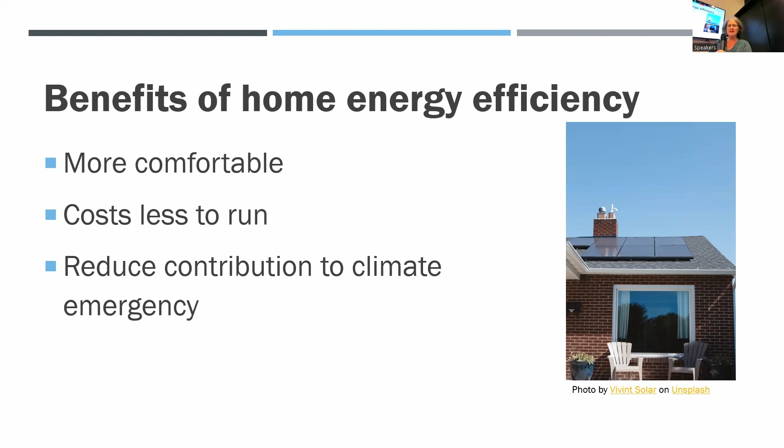The average Victorian home is fairly poor. Based on the scorecard tool, which is what I use as a sort of benchmark, the average home, 3 stars, costs about $1,800 a year just to run the main fixed appliances. That's heating, cooling, lighting, hot water, not all the other stuff. And that's quite a lot of money. The good thing about this, well it's not good, but the good thing is that it means lots of us have a huge amount we can save if we take some action.

I think the reason our houses are typically not too good is we've had a really mild climate, not many good building codes, cheap fuel, and most of us don't really know that much about home energy efficiency, which is why I love talking about it.

The 3 main factors of home energy efficiency are the building shell thermal efficiency. It's sometimes called the envelope, and it's just about how well your building keeps warmth in winter that you've generated, and heat out in summer. Appliance efficiency is about how efficiently your appliance gives you what you want. So if you've got a heater, how efficiently does it give you heat? An example is an open fire is about 5% efficient because most of the heat goes up the chimney, whereas something like a really new reverse cycle air conditioner will give you 300% the value of what you put in.

User behaviour is something that feeds back into both of those things. It works with everything. You can have a super well-designed house and energy efficient appliances, and it still would be possible to be very inefficient, and the opposite.

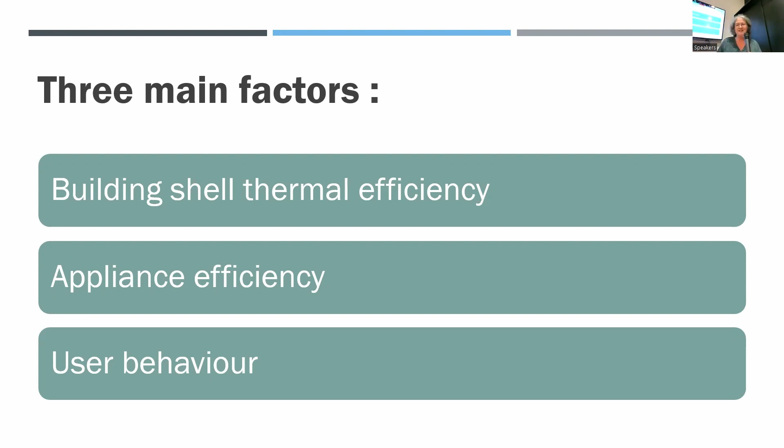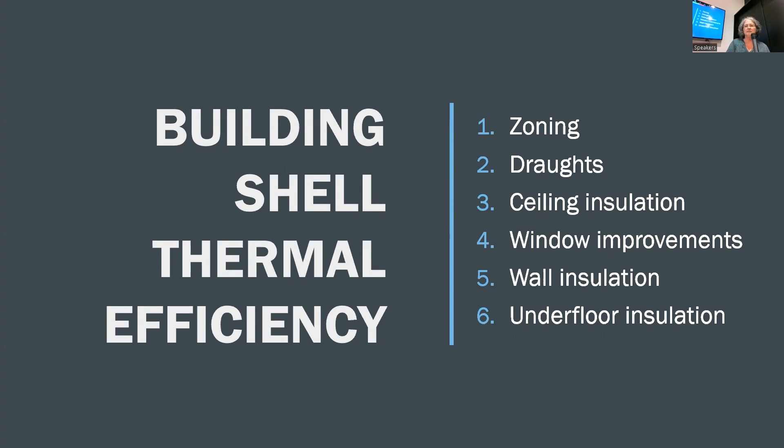So for building shell thermal efficiency, the key things I'd always look at are zoning, draughts, ceiling insulation, window improvements, and wall and underfloor insulation. These all play a part. With zoning, it's about creating multiple smaller zones, or the ability to create them. You don't have to always keep them closed, but being able to close them lets you zone areas in to keep warm or cool, or zone drafty areas out. Heating and cooling by zone is always the cheapest option.

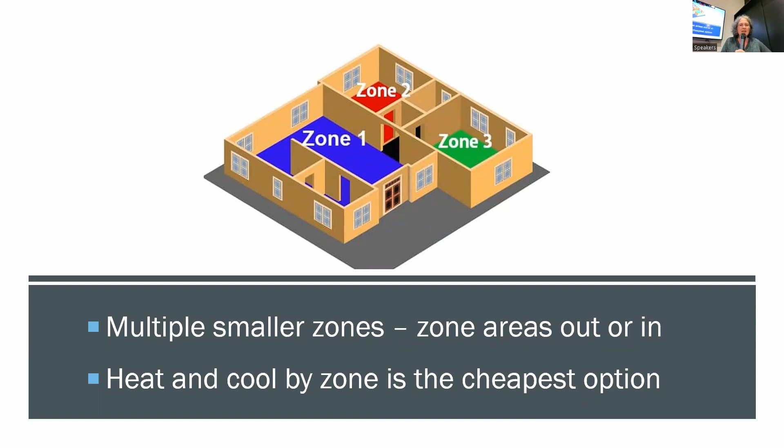Here are some great ways you can add zoning, even in places that haven't been thought about when built. It's a good example of what I see all the time - two-storey houses where they're trying to heat the bottom, the top, and the stairwell in between. Anything you can do to just chop your house into smaller bits when heating and cooling is going to help.

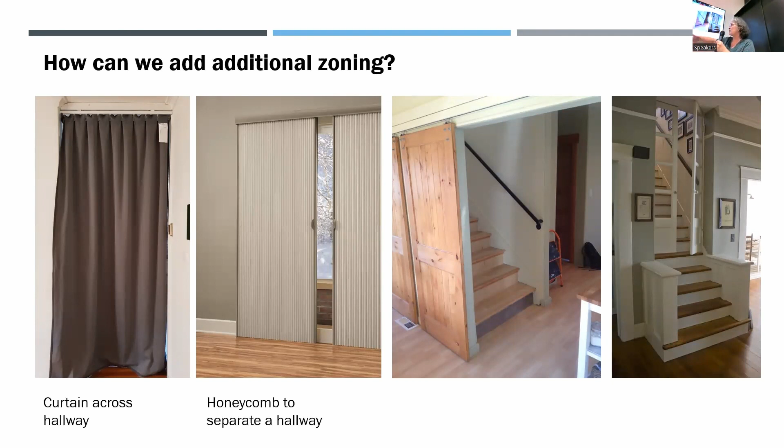This is another of my favourite options. You can buy a telescopic pole from the hardware store that you hang a curtain on in a doorway just in winter, and really reduce the amount of space you're trying to heat.

Draft proofing is another really good one. Zoning and draft proofing together are usually low cost and quite easy to do. There's a whole stack of places that you can commonly find drafts in a house.

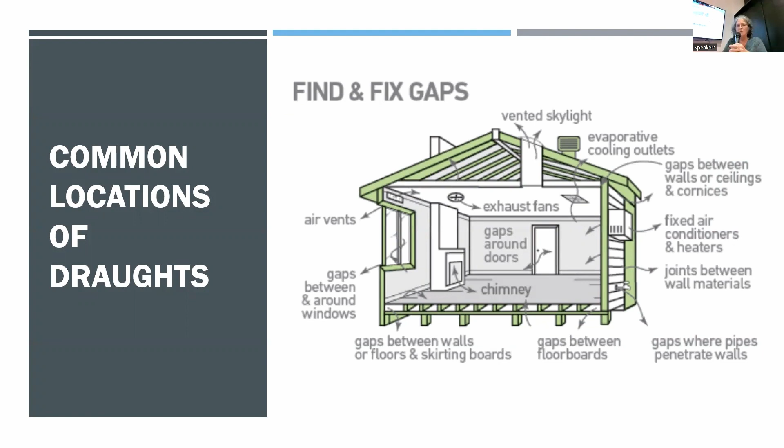I'm not sure if you can see that picture very well - can you see up the back? What I'll do actually is show you a graph. I'm not sure if you'll be able to see it properly because it's such a big graph, but this shows different kinds of drafts and the impact they have on your building shell efficiency.

The biggest impact is an open chimney, like I mentioned - they just suck air out of your house constantly. So it doesn't mean you can't have an open fireplace, but it's important to block it up when you're not using it. There are plenty of ways you can do that, very cheaply or with more fancy things.

The other really big impact is a large gap, something like a permanently open louvre window, like in a 70s bathroom. Then there are things people sometimes don't think about, like evaporative cooler vents - actually quite an impact - and wall and ceiling vents. This is a louver window too, but that's one of the closable ones. So there are plenty of ways.

Imagine if you could tackle even 80% of the drafts in your home. They say that the average Victorian home, if you add up all the gaps and cracks, it's like having a metre square window open all the time. Imagine if you could close that, or nearly close it.

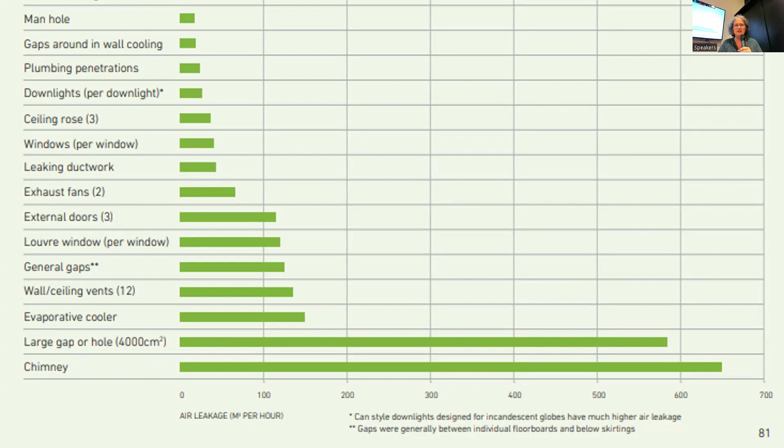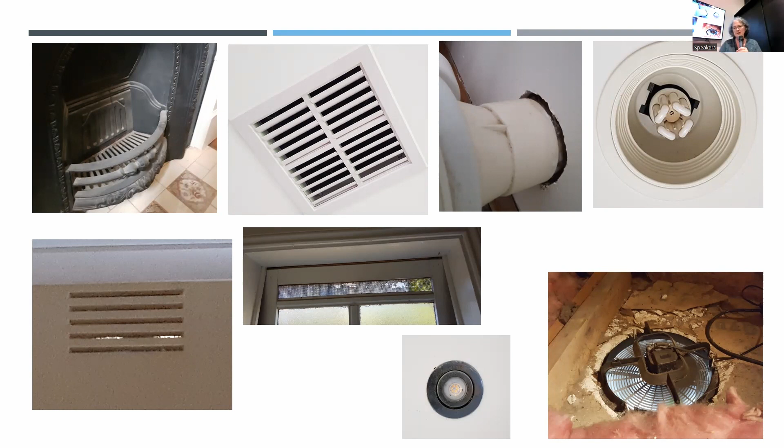This is just a picture of some of those gaps - wall vents. A lot of people don't realise you don't need them anymore unless you have a gas heater. That's a permanent vent in a window, and these are evaporative cooler vents. These are just random ones from when plumbing's been done. And that's what a exhaust fan that's unsealed looks like from in the ceiling space - just a hole straight into the roof, which you can imagine is a drafty, dusty place.

Ceiling insulation - the two key things about ceiling insulation are the R value, or the thickness, or the ability to stop heat transfer. And the other thing is it's really important that there's even coverage.

These are some examples of what frequently happens - you might have perfectly good ceiling insulation and then tradies come along and install something, lights or whatever. They pull it all away and suddenly you haven't got ceiling insulation anymore in big spaces. When you have 5% gaps in the coverage of your ceiling insulation, it actually halves the value at which it works. So it's very important to get full coverage.

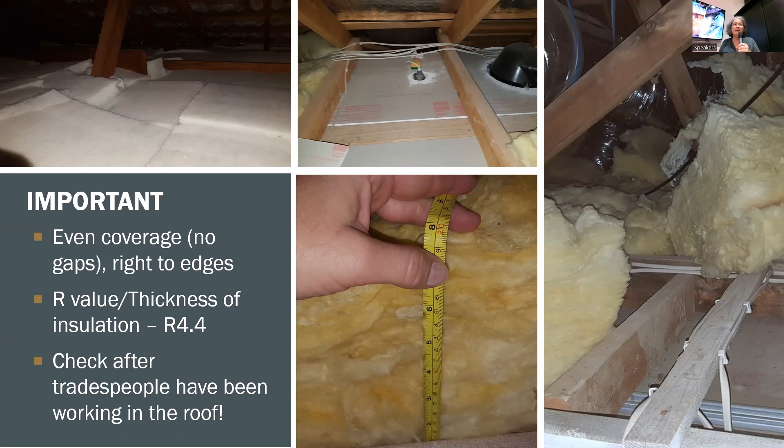This is another example where work has been done and what looks like really good insulation has just been moved around. So sometimes it's as easy as somebody getting up there and rearranging it, putting it back where it should have been.

Window improvements is a very favourite topic of mine because there are so many ways you can improve your windows, and it doesn't mean you have to spend $40,000 on new double glazed units. If you can, great, but there's a lot of things you can do on a very low budget. The reason windows are third on the list after zoning and drafts, then ceiling insulation, is because they're such a weak point of a building shell. Single pane glass has very poor insulating ability, and even double glazed glass is better but still allows heat transfer. So it's great if you can do a combination of things.

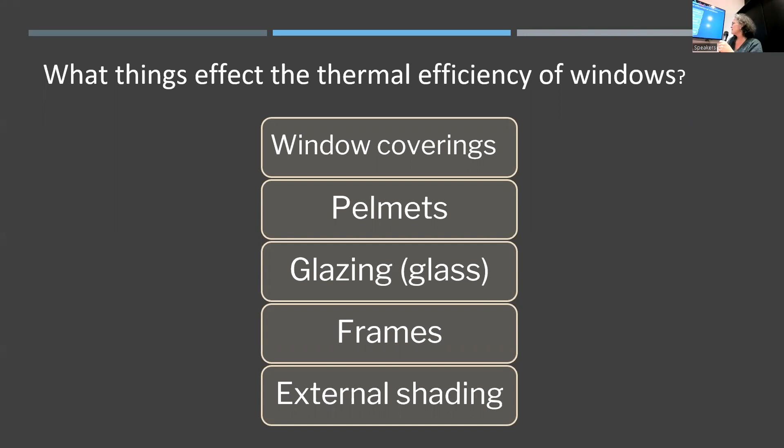The parts of a window that make a difference are window coverings and pelmets - they sort of go together. Then glazing or glass, frames, and external shading.

Sometimes, quite often I think, the easiest way to start is with improving your window coverings and pelmets, because it can make a really big difference with how you can keep your heat in winter especially. The key is to reduce airflow across the glass. Anything you can do to stop air flowing across the glass will help stop the heat moving through it. The best way is heavy drapes with an invisible pelmet on top.

Another good way is to put something like a honeycomb or cellular blind inside the window reveal. It doesn't work on all windows, but say these windows, for example, it would work quite well because you could put it straight inside.

You have no gaps, it's stopping airflow, so it's really efficient. These are examples of what's called an invisible pelmet. This one's just showing you can make it out of, I think, weed matting or something - something extremely cheap. And this one's pretty cheap too, it's just a DIY invisible pelmet kit. It's missing the whole boxiness of a traditional pelmet, but it still helps.

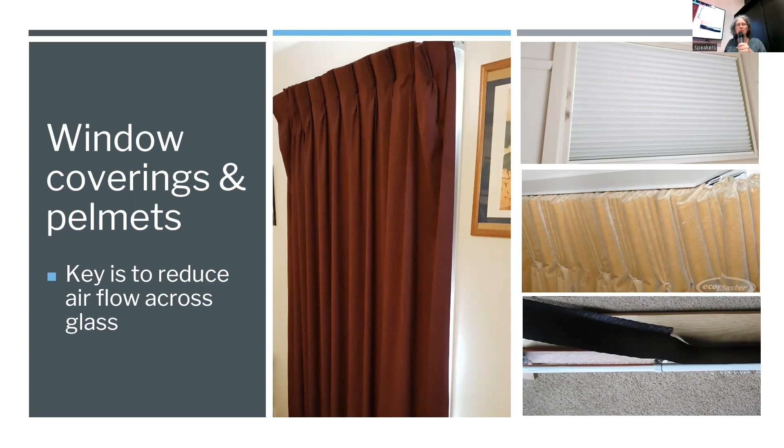With glass, there are all kinds of possibilities. There's, of course, double glazing with a brand new unit, and that's what most people do. But if you have really good timber frames - again, these windows are a good example - you could easily just take away the single glass and put double glazing in, and it's much cheaper. You've already got timber frames, which are the most thermally efficient frame, so keep them. Don't pay for new frames.

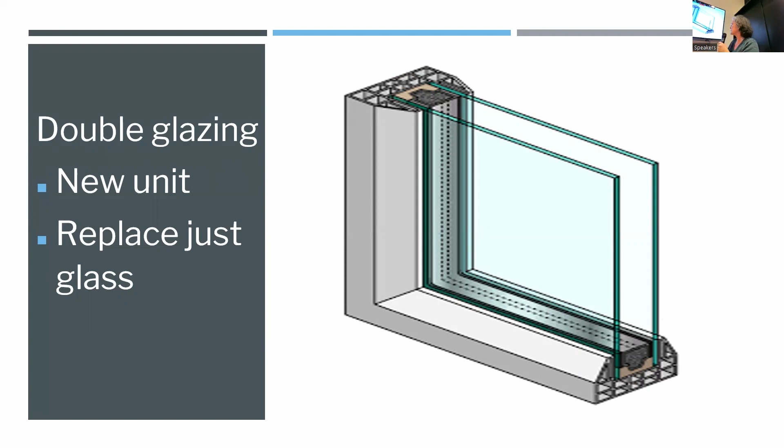If it's something like an awning window, often they can't handle the weight of double glazing. So something like secondary glazing comes into its own. That's where the original window and frame stay there completely, and you bring in another panel, usually clear acrylic - Perspex, I guess. It's completely clear, but it's lightweight, and that's why it works on sash windows, awning windows, sliding doors, and things where they might have trouble with a big heavy double pane of glass.

These are two pictures - this one is from Renew, the organisation. There's also a magazine just showing somebody adding clear acrylic, screwing it in basically with some timber beading. The only reason this coating is there is because it arrives like that so it doesn't get scratched, but that all gets taken off. It's completely clear, you wouldn't know it wasn't glass.

And then there's something called DIY secondary glazing, which is the same sort of thing. Actually, I'm getting myself mixed up - there are professional companies that do this, and they'll do it to a very high standard. Then this is a DIY option with clear acrylic, and this is a DIY option with making a pane. I think this is the one.

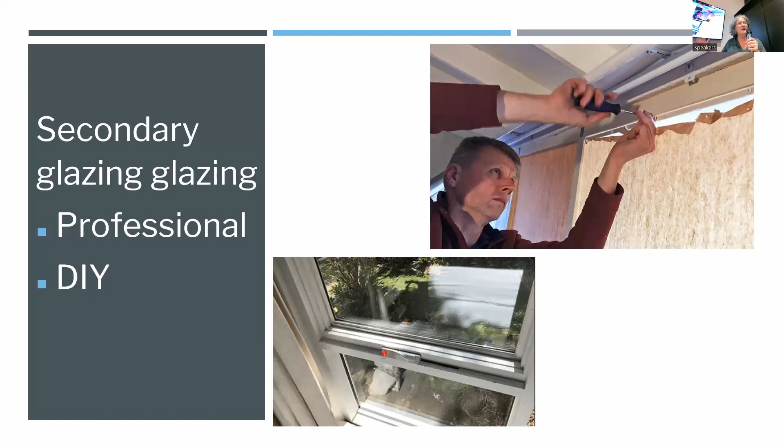You can just get the metal edgings that fly screens are made from and put clear plastic in them. If anyone wants a link, I can send you an article of how to do it. You just place them in your windows and there you go, you've got a removable second pane, which makes a big difference.

And then there's really low cost and temporary options. Well, that removable pane is one of them, but also bubble wrap, which might not look pretty, but if you're renting or on a really low budget - you're nodding, you've done it. Does it work? It works. Yeah, can't see out, but it works. So options for anyone - if you're freezing, you might care more about being warm than about being able to see out the window.

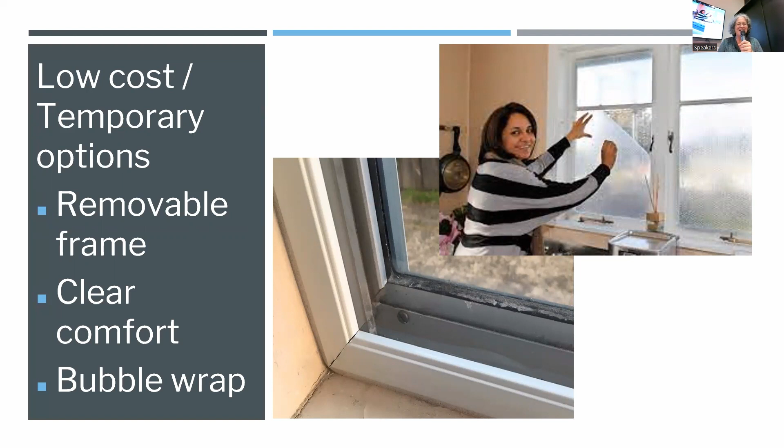Frames really do matter, and this is just to show that. This one at the top is a single glazed window with an aluminium frame, then a single glazed window with a timber frame, then a double glazed window with an aluminium frame - not too much better than the single. And then this is the best: double glazed with a timber or UPVC frame.

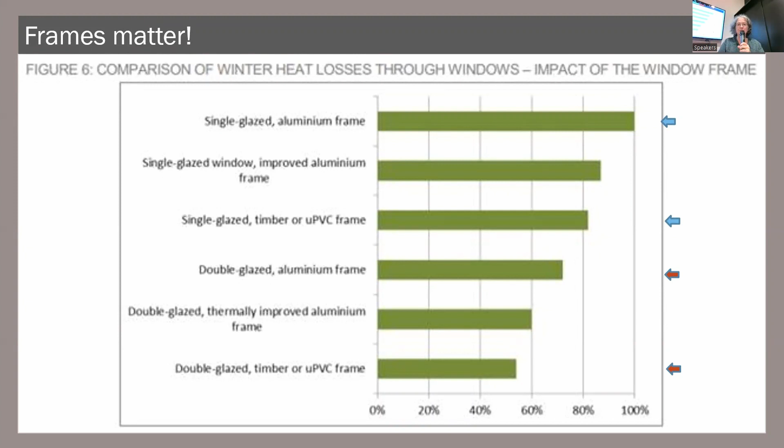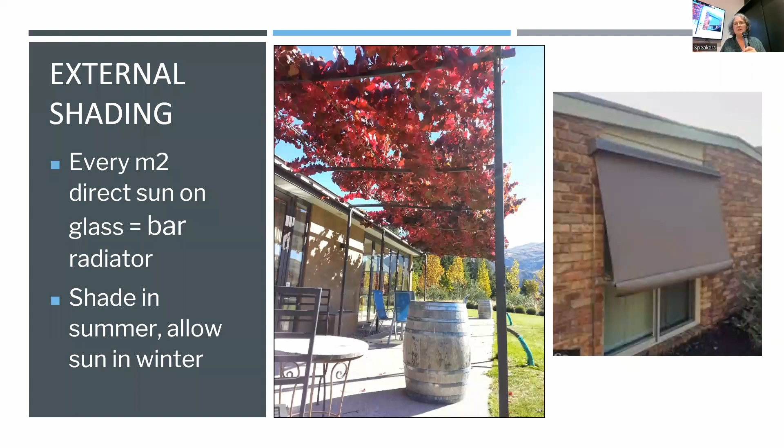External shading is the last thing about windows. It's really important if there's any issue with heat gain. You want to shade your external windows because the key is to stop the sunlight hitting the windows. Once it's there, coverings inside help a little bit, but the most effective thing is to shade it outside.

Claire, what's the time? How? You got 5 minutes?

Okay, thanks. Wall and underfloor insulation. First, wall insulation - not everyone knows that you can now have it pumped in. If you're doing renovation work on your house and removing weatherboards or plaster, the best way is to put in batts. But if you're not, you can just get it pumped in. They come with a big truck and blow it in with this type of reverse vacuum cleaner, and it's very effective. They can do it in either weatherboard or bricks.

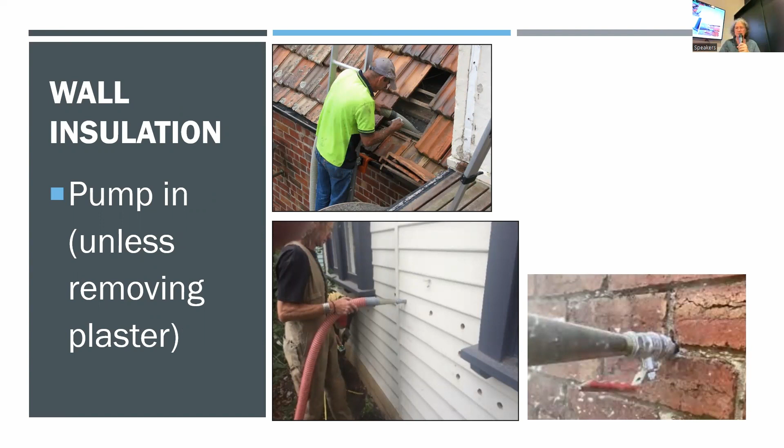Underfloor insulation is usually polyester batts, but it's a bit more rigid than ceiling insulation, and you can either strap it in or staple it into the sides. The key is to make sure you're actually buying underfloor insulation and not trying to use ceiling insulation under the floor.

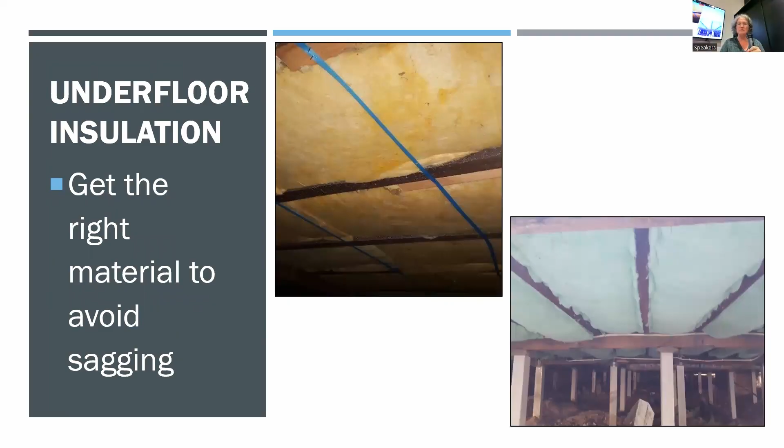And then the key energy using or generating appliances. Actually, I took the generating appliance out, which was solar, because we have an expert to talk about that. But heating, cooling and hot water systems - I'll just talk briefly about how to make them as efficient as possible.

So efficient heating - any of those building shell upgrades I talked about, the drafts, windows, etc., they're all going to make your heating more efficient in that it doesn't have to work as hard. If you've closed that metre wide window, then your heater isn't trying to continually replace all that warm air, so it uses less energy. If you do have to get a heating system, a split system, an individual reverse cycle air conditioner, which is the same as a split system, is the most efficient option.

Heating by zone - we talked about zoning already, but that can make a big difference. Setting a thermostat to a good winter temperature, which is about 18 to 20 degrees, is where those heaters will work most efficiently.

Servicing and cleaning - one example of that is this gas ductwork that's just falling apart. It's really important that you look after ductwork of ducted systems. That's the biggest loss you get in that sort of system, through the ducts.

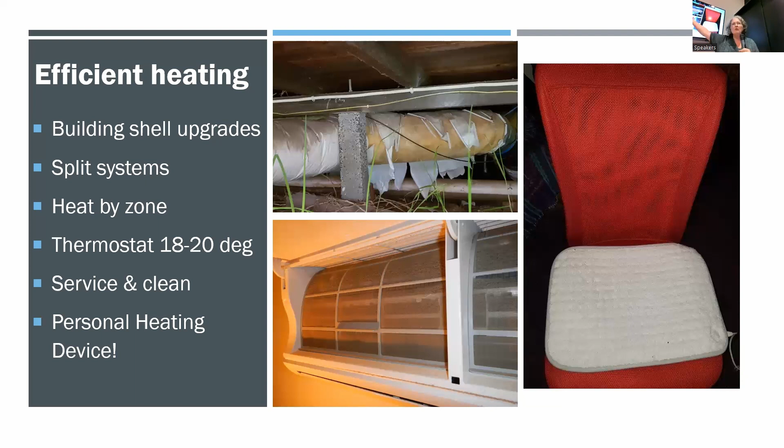And my personal favourite, personal heating device, also known as a PhD - so all of us can have a PhD, I have several. My teenage daughter has one too. It might sound daggy, but it's just the equivalent of a hot water bottle or an electric blanket. These days they make them into all sorts of amazing things, like heated throws, and I saw a heated foot pad that you can put under your office chair. This is my heated seat pad that goes in my office, and it means most of the time I don't need to put the heater on, because it's heating my body directly, and I've got my warm woolly jumper on. Instead of heating the air around me, it's just heating me. Everyone should get one.

Efficient cooling. A lot of this is the same as with heating. The building shell upgrades will help, plus the thermostat, servicing and cleaning, and cooling by zone. Of the most efficient options, ceiling fans and ventilation are key. We really need to think about ventilation when working out how to cool down our houses after a hot day, and potentially adding things like openable skylights at the top of stairs.

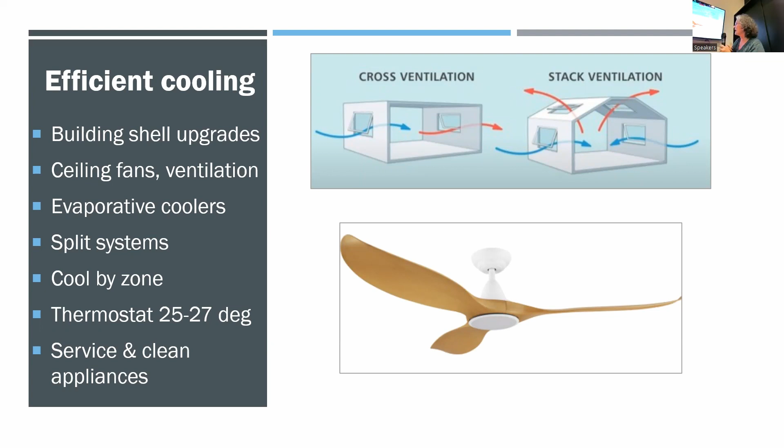If you need cooling, technically an evaporative cooler is the most efficient, but my personal feeling is that whereas 10 years ago they were probably a great option because of humidity, we are going to get a lot more heat waves, I think. Personally, I think they're not quite going to cut it anymore, and split systems are going to be the next best thing to do.

Last but not least, efficient hot water. There are really good rebates for replacing hot water systems, especially if you have an electric one. The most efficient options are solar hot water systems or heat pump. Some other things you can do for water are making sure your shower heads and tapware are reasonably low flow, because that reduces the energy needed to heat the water. Also insulating the pipes, called lagging, and this one has these beautiful valve hoses that also stop heat coming out of the system.

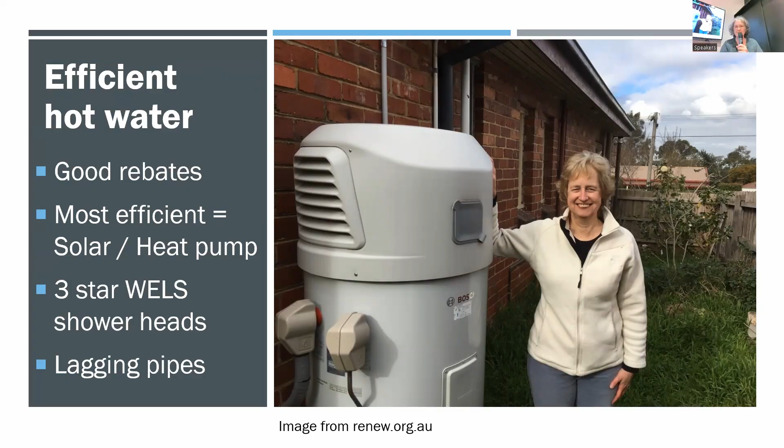I'm going to talk about renewable energy and a little bit about energy efficiency, because they go hand in hand. So energy efficiency first, and then generation second. That's the order it should be.

So I talk about technology. Companies send me a lot of products to do technical reviews and also to provide content for the public to learn about products. So that's what I do an awful lot of. I have a bit of fun while I'm doing it.

I even had a show for 2 years during lockdown because I couldn't go out. So I dressed up as a bad boy rapper and would talk tech. It was a tech show with me dressed up as a bad boy rapper. There you go. But anyway, let's get on to the main thing.

One of the questions I get asked a lot, because there's waves of enthusiasm for technology, and in the renewable space, batteries have suddenly become the thing. People keep asking me, should I have solar? Should I have batteries? And I always say you've got to start with what you want to achieve.

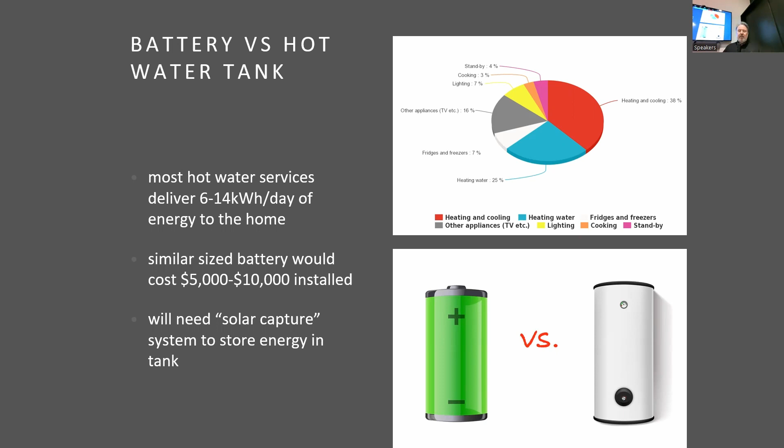To give a good example, I've picked two roofs in Melbourne, a north-facing roof and a south-facing roof, using the technical term peak sun hours (PSH)—the amount of energy falling on a surface daily. On average, a north-facing roof at about 30 degrees incline gets 4.67 peak sun hours, which can be converted into electricity by solar panels.

A south-facing roof isn't nothing—it's 3.48. Remember, that's an annual average. It'll be worse in winter, but almost the same in summer because the sun is still high. So a south-facing roof is really about 75% as good as a north-facing roof in Melbourne.

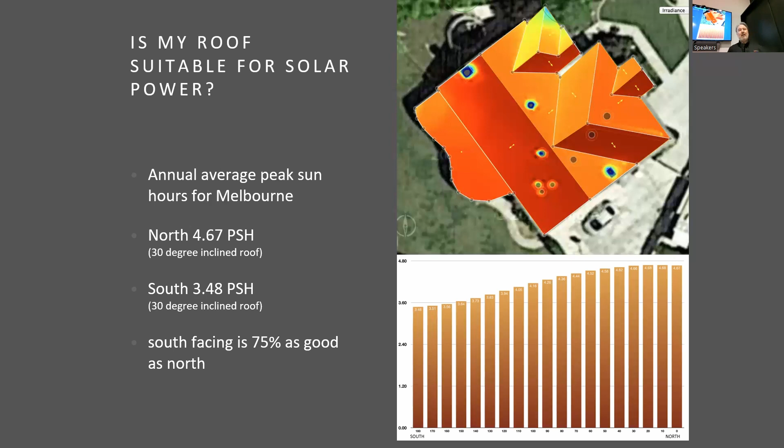If you're worried that south-facing isn't very good, a south-facing roof in Brisbane is actually better than a north-facing roof in Melbourne. It's all about latitude—the further south you are in the southern hemisphere, the bigger the difference will be. Any part of your roof that sees sun, even if not optimal, will generate some electricity. It can be modelled, and your installer can do those calculations.

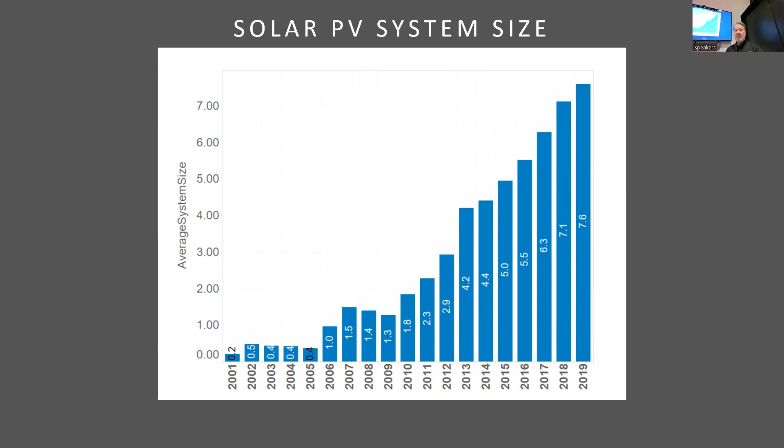For instance, the solar battery rebate has dropped from its opening value—it was about $4,800, now down to $3,500. The Victorian government realises that as a government they can directly fund big projects like a battery or solar farm, or give the money to mums and dads to put solar, batteries, solar hot water, or energy efficiency onto their homes, helping them reach renewable energy targets.

The solar hot water rebate program offers up to 50% support, up to $1,000, for solar hot water heating systems. Heat pumps are more expensive than a regular resistive element tank, but the cost savings are so great it doesn't take long to win out in terms of total cost of ownership—just a matter of years. The problem is people generally don't think about replacing hot water services until they fail.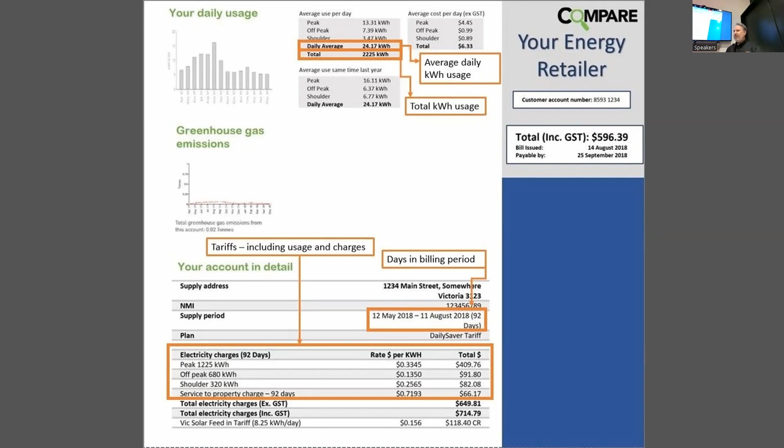And they're not affiliated with an energy company? No, they're not affiliated with any energy company at all. They were started by some academics from University of New South Wales.

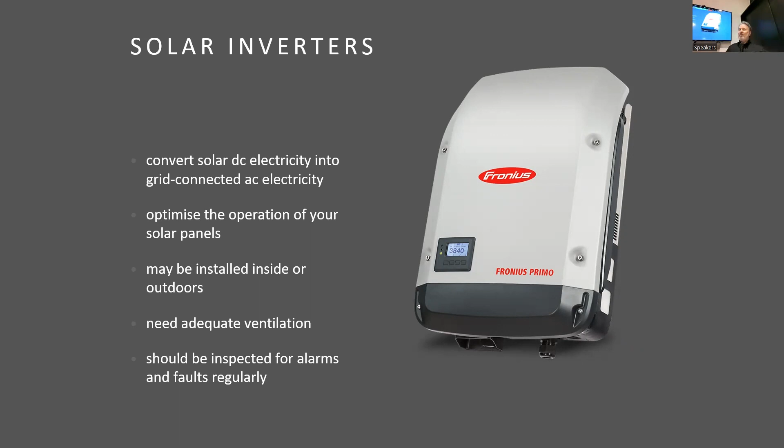Solar inverters - now we're getting into the solar stuff a bit deeper. What does an inverter do? You hear about inverter air conditioners and inverter fridges. Well, we're talking about something that takes solar power, DC energy, converts it to AC, and can directly supply appliances within your house. But a solar inverter by itself generally only works when the grid's present - it's not an independent system by itself. It needs the grid to function, but when the grid's there, it synchronizes with it and starts to feed your home with electricity.

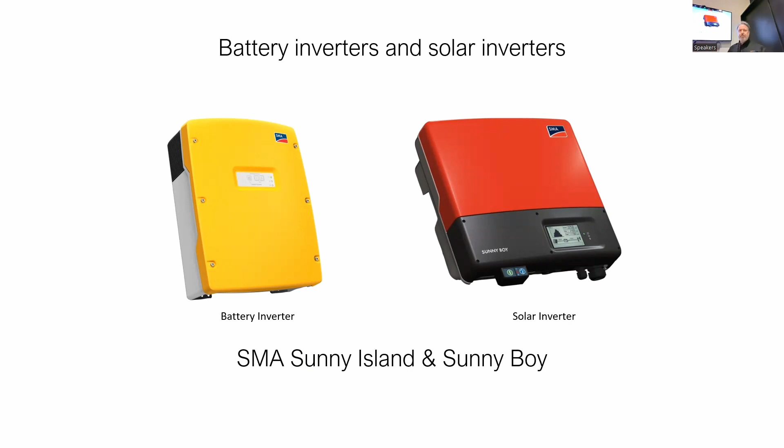Battery inverters can be a separate item, so sometimes you can have a solar inverter and a battery inverter. In this case, I'm showing the same brand, Sunny Island SMA and the Sunny Boy. The yellow one's a battery inverter and it can be a completely independent product - this is probably more typical of an off-grid system. So this one takes solar panels, and this one you connect to batteries. But sometimes they're combined into one product, and we call these hybrid inverters - they have batteries connected to them, they have solar panels connected to them. It's only one product, and that's very compact.

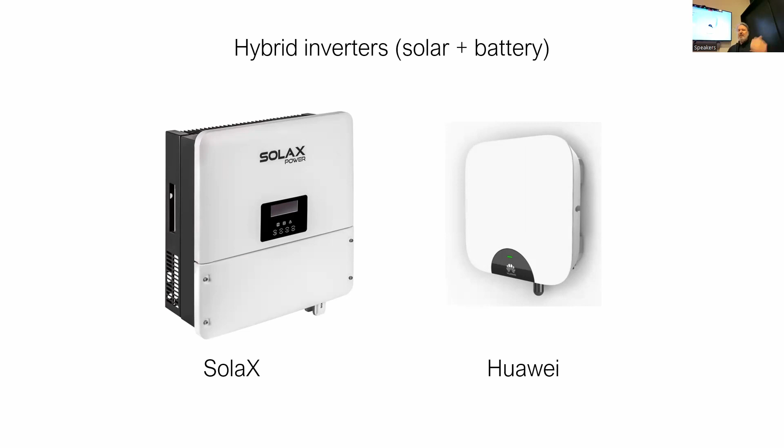So if you're doing a new installation and thinking about adding batteries at a later date - hopefully not too late, because products change - they can be what's called battery ready. It can work as a standard solar inverter, but maybe a year later you go, I'm ready, I'm going to add batteries to it. So hybrid inverters are basically an all-in-one solution. There are a couple of examples there.

Now you've probably heard of this company called Tesla. Some people think they're the only battery there is, but there's one of many actually. They're not truly a battery by itself - they're a battery and inverter in the one box, so it's actually a combined product. That means it can be added to any existing installation. You might already have solar and think, oh gee, I didn't buy a hybrid inverter - does that mean I can't have battery storage?

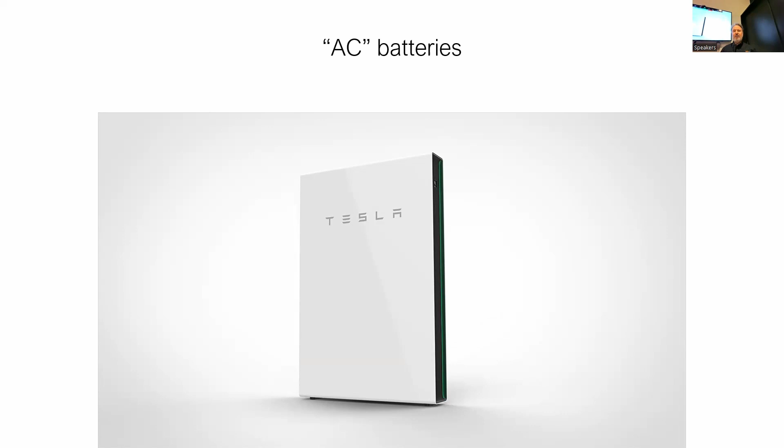There's some things that make solar panels work better, called solar panel optimizers. They really come to the fore when you have a difficult roof where you've got shading or multiple facets of the roof facing different angles. They can make every panel work independently of every other panel, so that's a really nice feature for houses with shading problems.

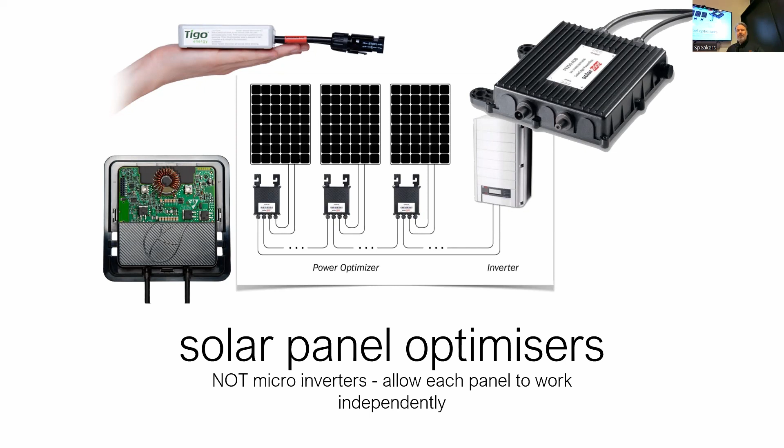With a system without those special optimizers on, the whole system would be the same colour because they all work together as one. It's kind of like stepping on a hose - you're just stepping on a little bit of it, but the water at the other end is affected. So optimizers overcome that problem by making every panel effectively independent.

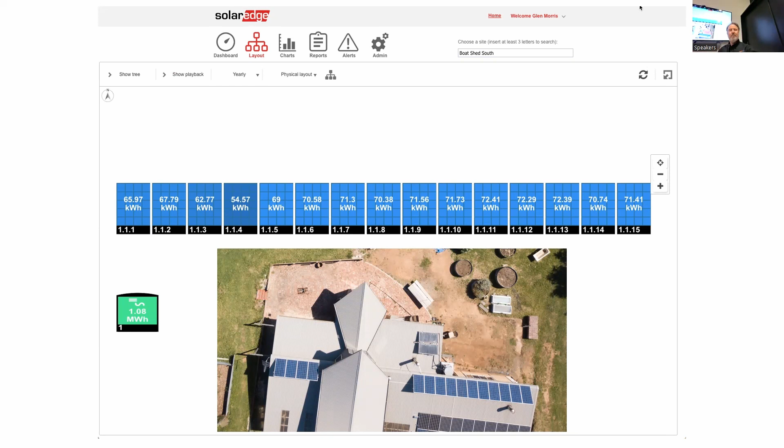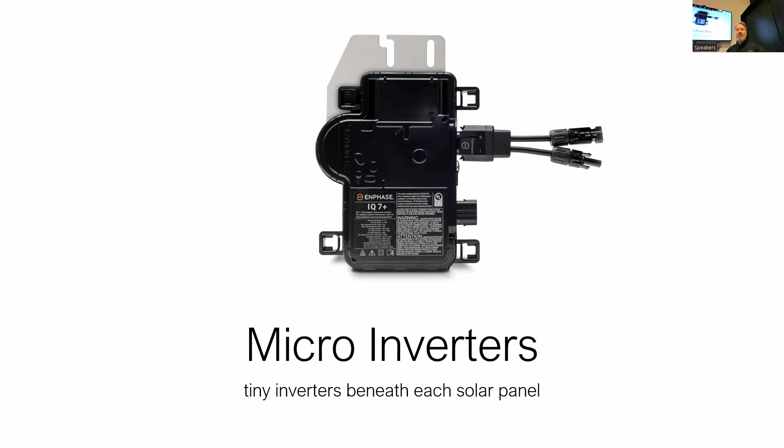When it comes to batteries, there's actually a huge range. People think there's only Tesla, but there's actually a huge range. These days there's a new battery standard - I actually helped write it, on the committee - and there's a lot of restrictions about where you can put it.

You can't put batteries in a habitable room in a domestic installation - you can't go in your lounge or living room. Even though all the marketing from Europe comes with pictures of a battery system next to the couch, you can't do that in Australia. We don't trust them enough yet, so we're a bit cautious. You've got to work with your installer to find a suitable location - commonly a garage outside the house, a utility room, or a back shed.

What we call AC coupled batteries can be connected to any existing solar system, so you don't have to get rid of what you've already got - you can just add it. You can also add another hybrid system in parallel to an existing solar system, meaning you get more solar panels and a battery. That's kind of nice, but there are restrictions on how much inverter capacity you're allowed to install at any one home.

That's up to the utility - not the person you pay your electricity bill to, but the company who owns the poles and wires that come to your house. They'll put some limits on how much inverter capacity they'll let be connected to your home, to do with managing their assets and their network. These days it's getting pretty small, like around 5 kilowatts on a single phase home is often the limit, while 3-phase allows generally bigger systems. So that can be a restriction.

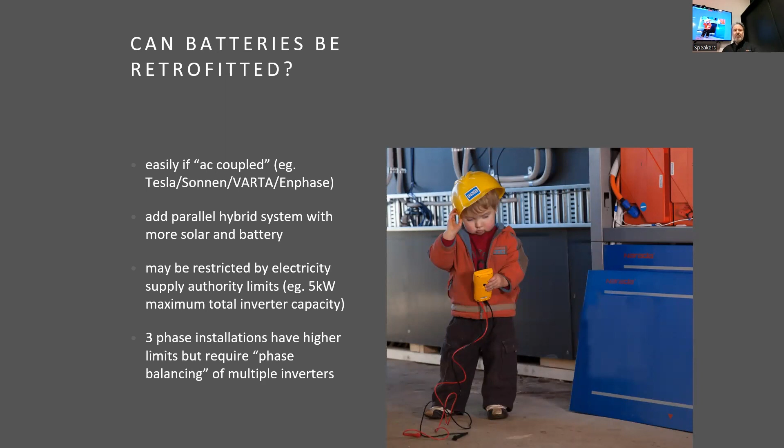Monitoring is something that's really important when it comes to making sure things are still working. There's a lot of companies, like I mentioned Solar Analytics with their bill optimizer - they can also monitor your solar and how well it's working. They can even do historical comparisons, and their little AI engine will tell you that your system's not working very well.

Because they'll see that last year in February there was a certain amount of generation, but this year it's not very good, and they know the weather hasn't changed, so something's changed at your end. They'll send you a little report. That's pretty clever. So monitoring systems are important for keeping abreast of any possible problems with the operation of your system.

Now, let's try and remember where I put that slide in there. I might actually skip over that one.

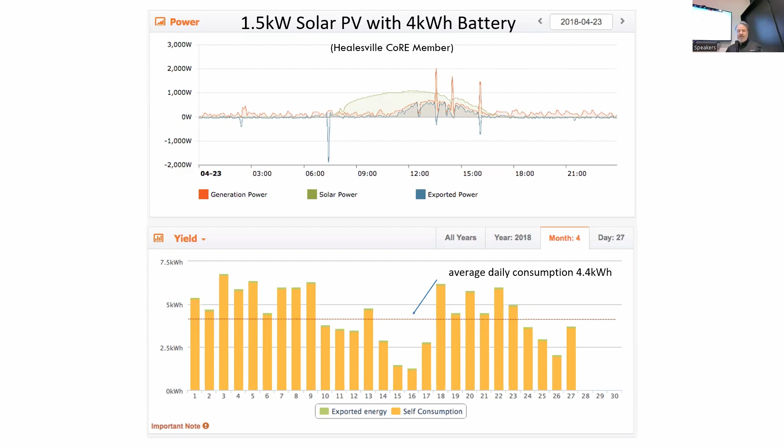And there's the economic analysis, just showing the payback. For this particular system, for the investment price of $6,300, the payback for them was bang on 5 years. Now, that's pretty typical for a solar-only system.

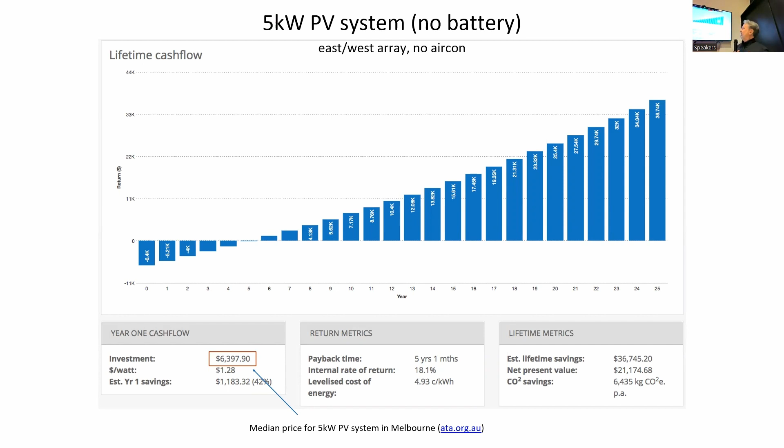However, if you were to add batteries to the same system, the same house, it pushes out to 9 years. And it's a bigger investment - it's now $16,000. By the way, since I've done this analysis, Tesla have put their prices up quite a bit, so it's probably more like 11 or 12 years, which is beyond the warranty. So I guess the take-home message there, adding batteries is not actually going to be a great investment. Solar was a much better one.

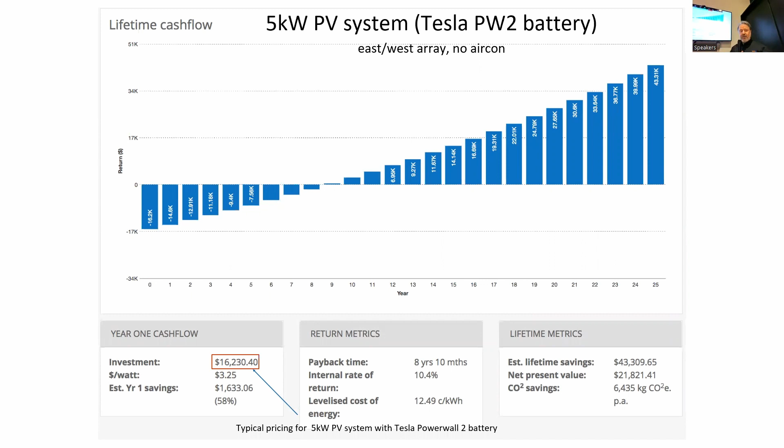I was putting a shade area on the western side of my house, and I was going to do it all out of timber. My friend who was working for me at the time said, Glenn, we've got those old panels out the back we took off some client, they'd be cheaper than wood, why don't we put those up? It turns out a second life for solar panels can be a carport, a shade area, you build a fence out of them. And what do you know? They still work, so we connected them up anyway.

So it's a shade sail primarily, and it also generates some electricity. The house is straw bale, so it's got massively thick walls.

I think I was inspired by you, Rosemary.